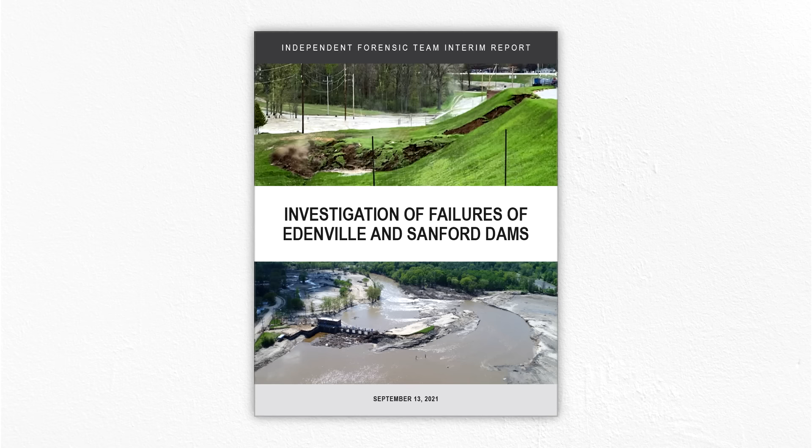The independent forensic team charged with investigating the event released an interim report on the failures in September 2021. The conclusions of the report include a discussion of a relatively rare phenomenon in earthen dams. Let's walk through the investigation and try to understand what happened.

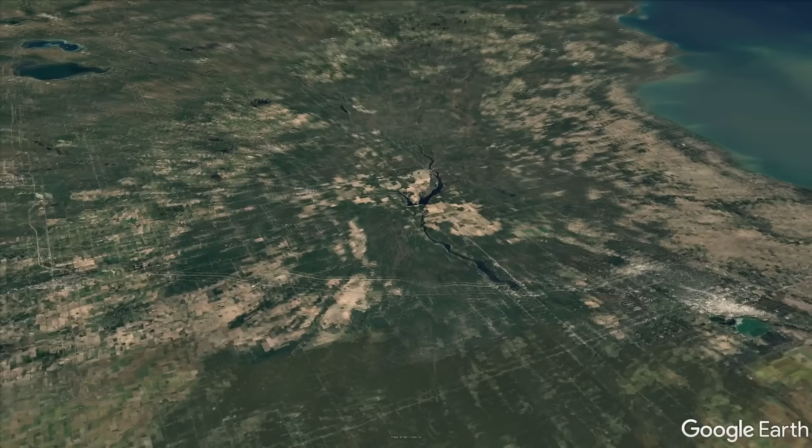Edenville and Sanford dams were two of four dams owned by Boyce Hydropower along the Tittabawassee River in Michigan. The dams were built in the 1920s to generate hydroelectricity. Edenville Dam was constructed just upstream of the confluence with the Tobacco River. It was an earth-fill embankment dam with two spillways and a powerhouse.

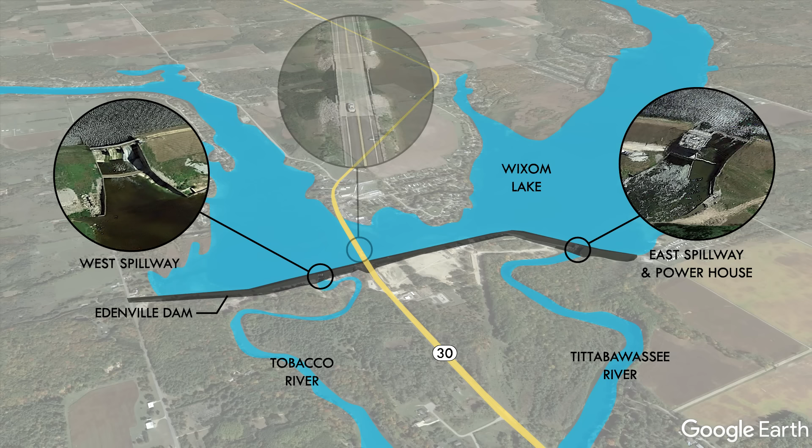The water impounded by the dam formed a reservoir called Wixom Lake, nearly the entire perimeter of which was surrounded by waterfront homes. State Highway 30 bisected the dam along a causeway, splitting the lake between the two rivers with a small bridge to allow water to flow between the two sections of the reservoir.

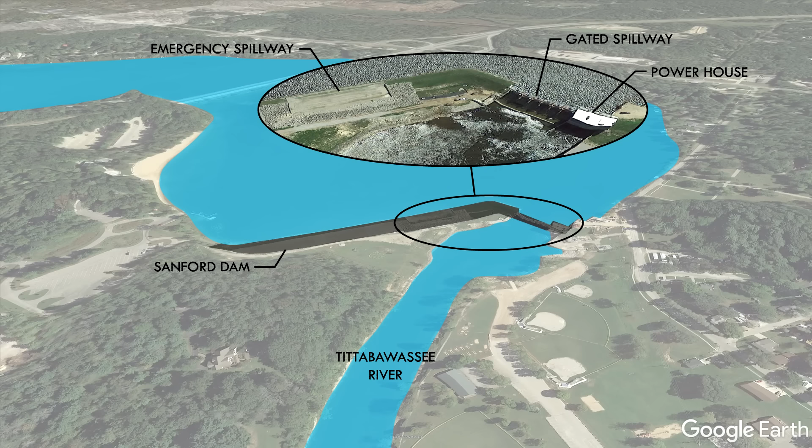Sanford Dam downstream was a similar structure as Edenville, but not nearly as long. It consisted of an earthen embankment, a gated spillway, an emergency spillway, and a powerhouse for the turbines, generators, and other hydroelectric equipment.

Edenville Dam in particular had a long history of acrimony and disputes between the dam owner and regulatory agencies. Most dams that generate hydroelectricity in the U.S. are subject to oversight by the Federal Energy Regulatory Commission, or FERC. But Edenville Dam had its license to generate hydropower revoked in 2018 when the owner failed to comply with FERC's safety regulations.

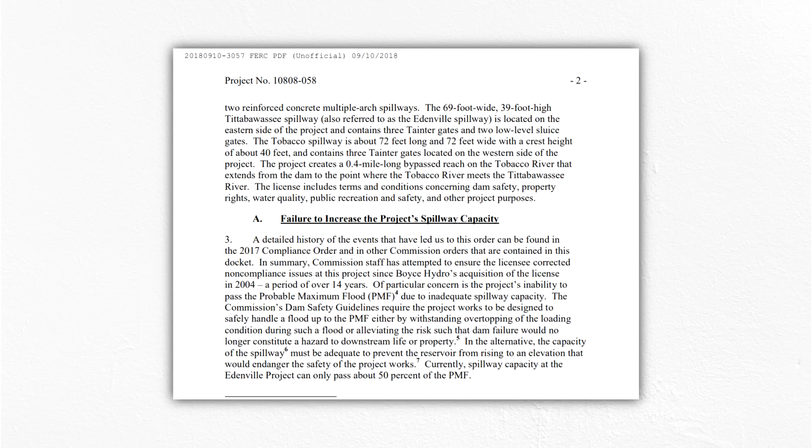Their report listed 7 concerns, the most significant of which was that the dam didn't have enough spillway capacity. As a result, if a severe storm were to come, the dam wouldn't be able to release enough water to prevent the reservoir level from climbing above the top of the structure, overtopping it and likely causing it to fail. After losing the license to generate hydropower, jurisdiction over the dam fell to the state of Michigan, where disagreements about its structural condition, spillway capacity, and water levels in Wixom Lake continued.

The days before the failure had already been somewhat rainy, with small storms moving through the area. But heavy rain was in the forecast for May 18th. The deluge arrived early that morning, and it didn't take long for the water levels in Wixom Lake to begin to rise. By 7 a.m., operators at the dam had started opening gates on both spillways to release some of the floodwaters downstream.

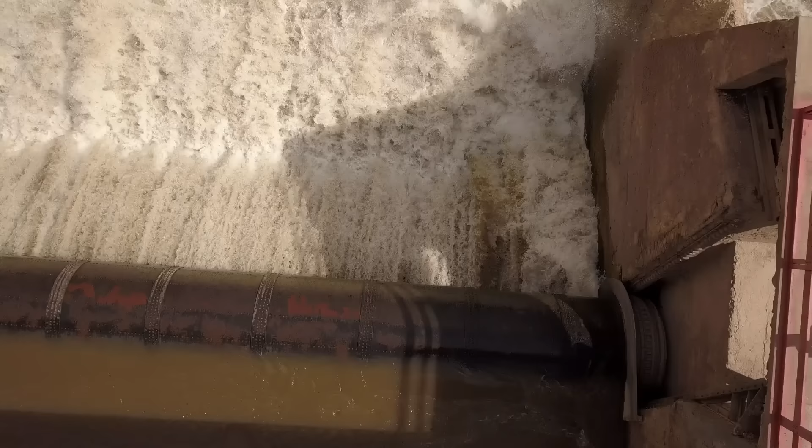Gate operations continued throughout the day as the reservoir continued rising. At 3:30 p.m., all 6 gates, 3 at each spillway, were fully opened. From then on, there was nothing more operators could do to get the floodwater out faster, and the level in Wixom Lake continued to creep upwards. That night, the lake reached the highest level in its history, only about 4 feet or 1.3 meters below the top of the earthen dam.

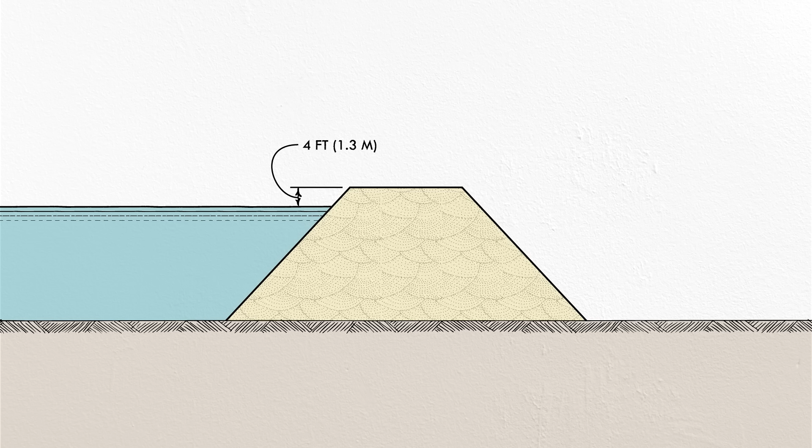At daybreak on May 19th, it was already clear that Edenville Dam was struggling from the enormous forces of the flood. Operators noticed severe erosion from the quickly flowing water in the reservoir near the east spillway along the embankment. Regulators and dam personnel met to review the damage, and a contractor was brought in to deploy erosion control measures. And still, the water kept rising.

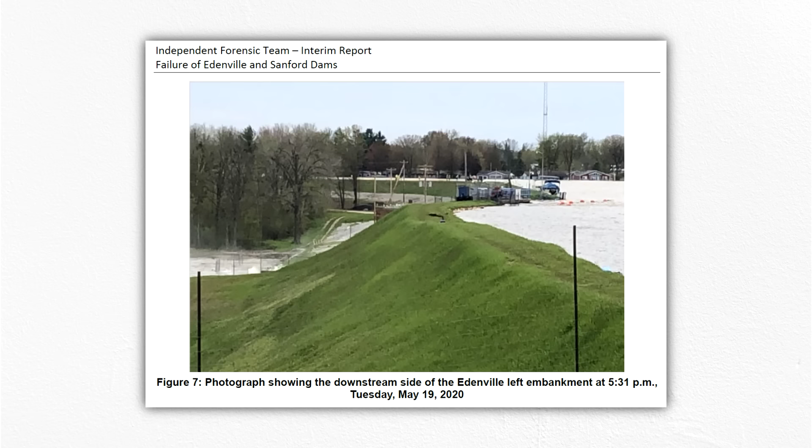By 5 p.m., Wixom Lake had risen to within around a foot or 30 centimeters from the top of the dam. As crews worked to mitigate the erosion problems in other places, eyewitnesses noticed a new area of depression on the far eastern end of the dam. This part of the embankment hadn't been a significant point of focus during the flood because it wasn't experiencing visible erosion, but it was apparent something serious had happened.

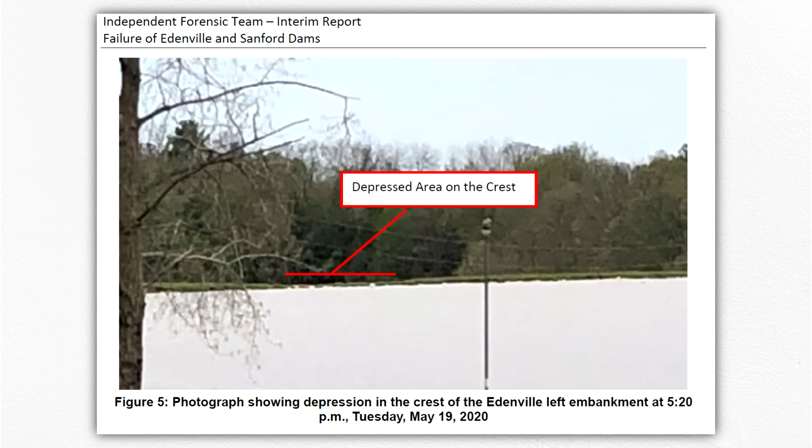Photos from a few hours earlier didn't show anything unusual, but now the top of the embankment sank down nearly to the reservoir level. Eyewitnesses moved to the nearby electrical substation to get a better look at this part of the dam. Within only a few moments, the embankment failed. Lynn Coleman, a Michigander and one of the bystanders, caught the whole thing on camera. Over the next 2 hours, all of Wixom Lake drained through the breach in the dam.

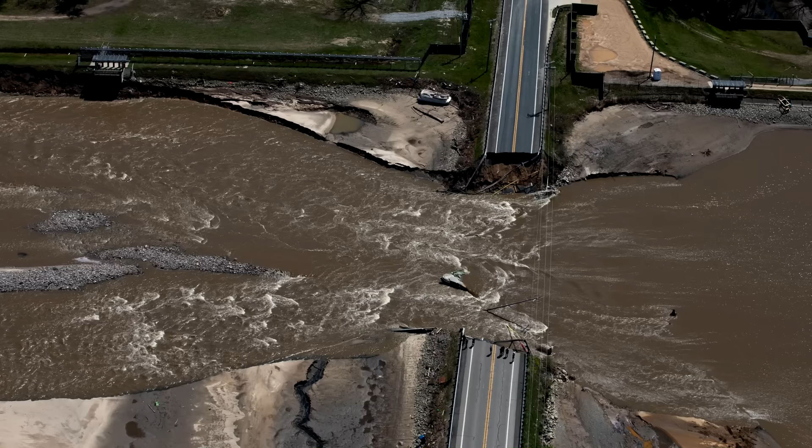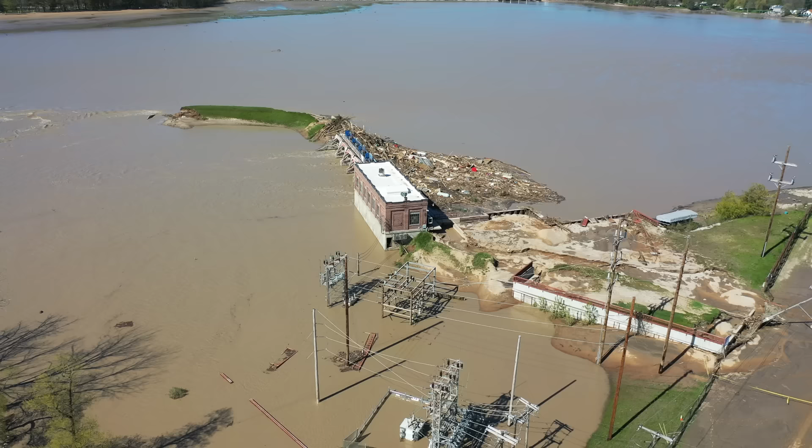Water rushing through the narrow gap in the causeway washed out the highway bridge, and all of the waterfront homes and docks around the entire perimeter of the lake were left high and dry. As the floodwaters rushed through the breach into the river, the level downstream in Sanford Lake rose rapidly. By 7:45, the reservoir was above the dam's crest, quickly eroding and breaching the structure.

With the combined volumes of Wixom and Sanford Lakes surging uncontrolled down the Tittabawassee River, downstream communities including Sanford, Midland, and Saginaw were quickly inundated. Google Earth shows aerial imagery before, during, and after the flood so you can really grasp the magnitude of the event. More than 10,000 people were evacuated, and flooding damaged more than 2,500 structures. Amazingly, no major injuries or fatalities were reported.

In their interim report on the event, the independent forensic team considered a broad range of potential explanations for what happened at Edenville Dam. Although the spillway for the dam was undersized per state regulations, this storm didn't completely overwhelm the structure. The level in Wixom Lake never actually went higher than the top of the embankment. So overtopping, one of the most common causes of dam failure, including the cascading loss of the downstream Sanford Dam, was eliminated as a possible cause of failure for Edenville Dam.

The team also looked at internal erosion, a phenomenon I've covered on this channel before that has resulted in many significant dam failures. Internal erosion involves water seeping through the soil and washing it away from the inside. However, this type of erosion usually happens over a longer time period than what was witnessed at Edenville Dam. No water seepage exiting the downstream face of the embankment or eroding soil was evident in the time leading up to the breach, ruling this mechanism out as the main cause of failure.

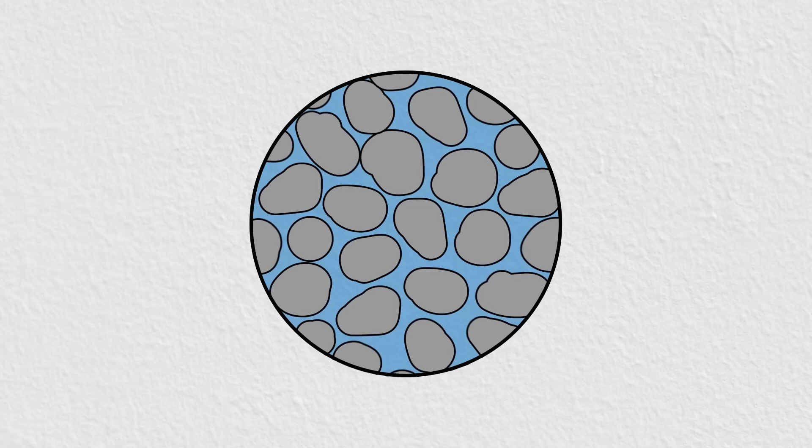Liquefaction happens when soil experiences an applied stress, like an earthquake, that causes it to behave like a liquid, and it mostly happens in cohesionless soils, those where the grains don't stick together, such as sand. When a body of cohesionless soil is saturated, water fills the pore spaces between each particle. When a load is applied, the water pressure within the soil increases, and if it can't flow out fast enough, it forces the particles of soil away from each other. A cohesionless soil's strength is derived entirely from the friction between the interlocking particles. So, when those grains no longer interlock, the ground loses its strength.

Some of the most severe damage from earthquakes comes from the near instant transformation of underlying soils from solid to liquid. Buildings sink into their foundations, sewer lines float to the surface, and roads crumble without underlying support. Liquefaction typically requires cyclical loading, like during an earthquake, or extreme sudden displacements to trigger the flow. Gradual increases in loading will only cause the water within the soil to flow out, equalizing the pore water pressure. But some soils can reach a point of instability and liquefy under sustained or gradually increasing loading conditions in certain circumstances. This phenomenon is known as static liquefaction.

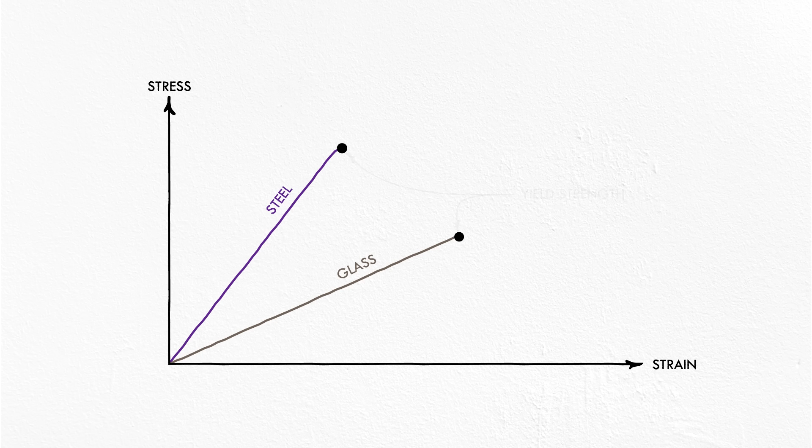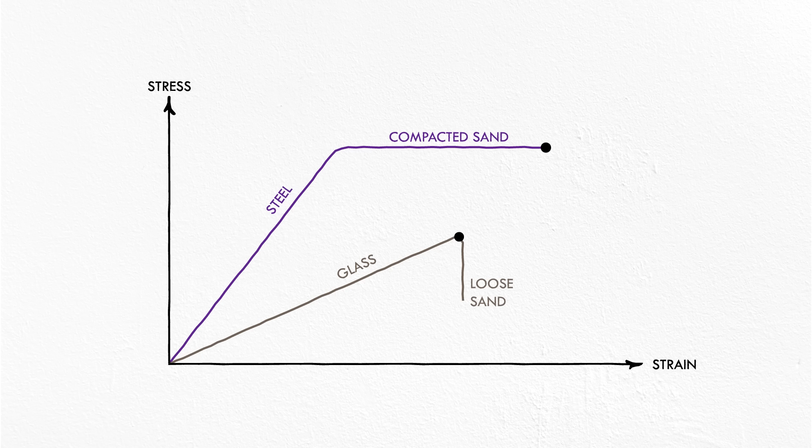A good analogy is the difference between glass and steel. Both materials have a linear stress-strain curve at first. In simple terms, the harder you push, the harder they push back. But both reach a point of peak strength, beyond which a soil will fail or deform. Well-compacted sand is like steel. It fails with ductile behavior. If you stress it beyond its strength, it deforms, but the strength is still there. In other words, if you want to keep deforming it, you have to keep applying a force at its peak strength. On the other hand, loose sand is like glass. If you push it beyond its peak strength, it fails with brittle behavior, suddenly losing most of its strength.

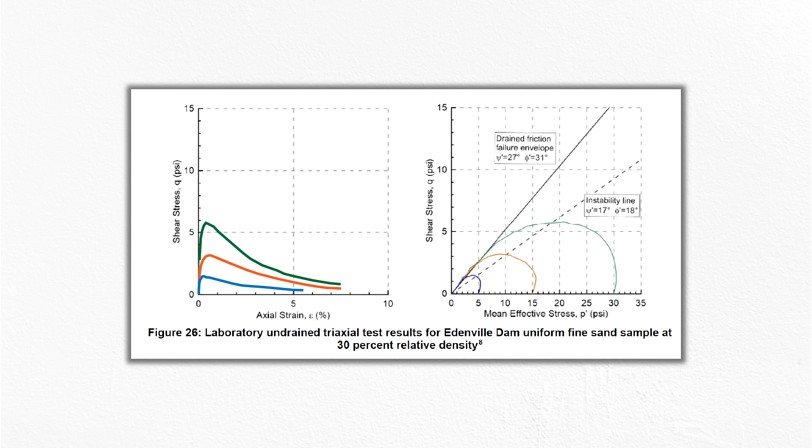The independent forensic team took samples of the soils within the Edenville Dam embankment and subjected them to testing to see if they were liquefiable. The tests showed brittle collapse behavior necessary for static liquefaction. They also reviewed construction records and photographs where no compaction equipment was seen.

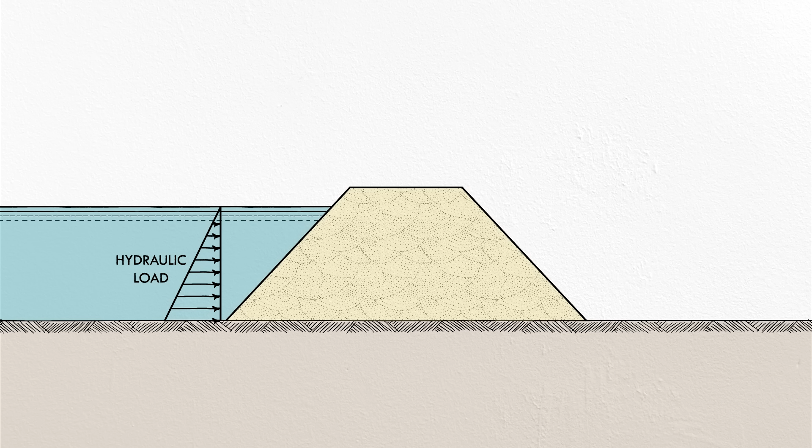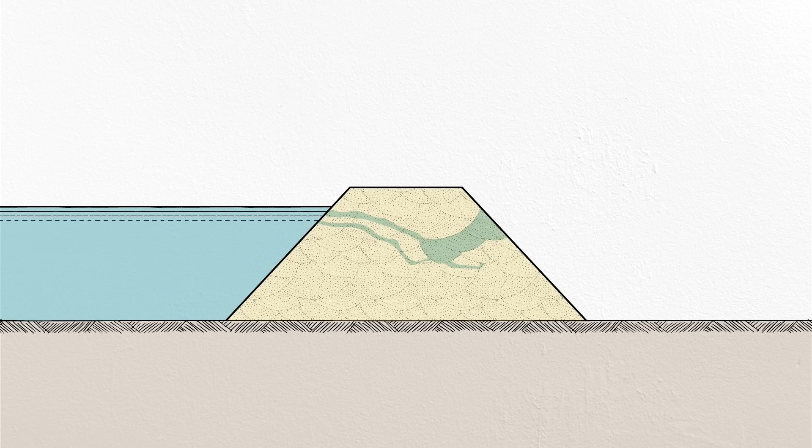The team concluded that as the level of Wixom Lake rose that fateful May evening, it increased the hydraulic load on the embankment, putting more stress on the earthen structure than it had ever been asked to withstand. In addition, the higher levels may have introduced water from the reservoir to permeable layers of the upper embankment, as evidenced by the depression that formed before the failure, increasing seepage and thus increasing the pore water pressure of saturated, uncompacted sandy soils within the structure.

Eventually, the peak strength of the embankment soil was surpassed and a brittle collapse resulted, liquefying enough soil to breach a downstream section of the dam. A few seconds later, lacking support from the rest of the structure, the dam's upstream face collapsed and all of Wixom Lake began rushing through.

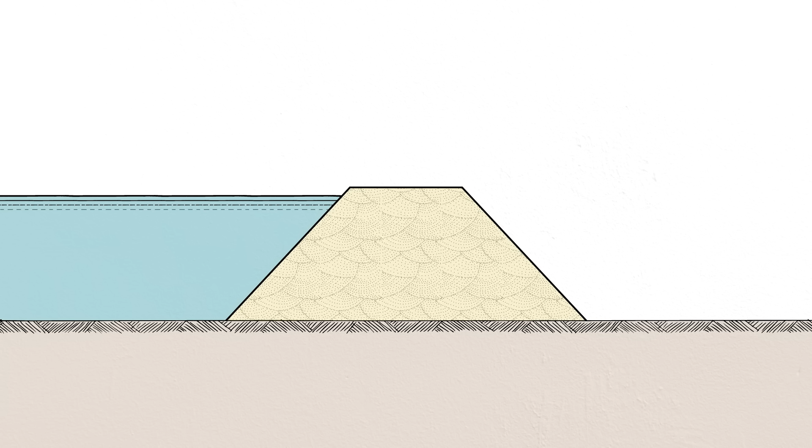Edenville Dam was built in the 1920s, before most of our current understanding of geotechnical engineering and modern dam safety standards existed. Most dams are earth and embankment dams, but modern ones are built much differently than this one was. Embankments are constructed slowly from the bottom up in individual layers called lifts. This lets you compact and densify every layer before moving upward, rather than just piling up heaps of loose material.

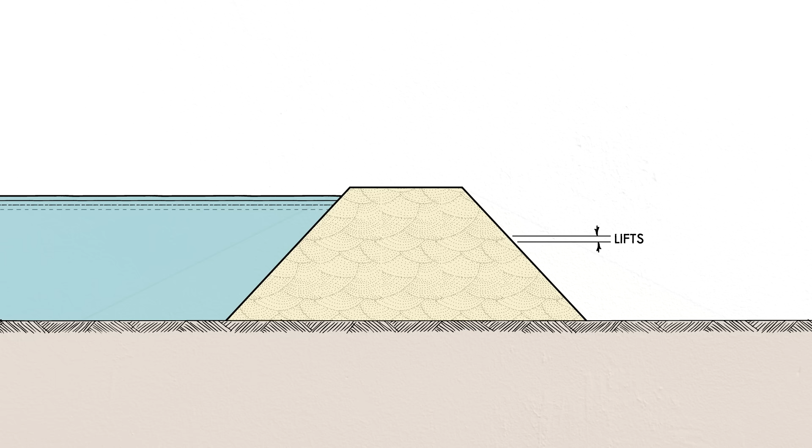We use gentle slopes on embankments to increase long-term stability, since soils are naturally unstable on steep slopes. We have strict control over the type of soil used to construct the embankment, constantly testing to ensure the properties match or exceed the assumptions used during design. We often build an embankment of multiple zones.

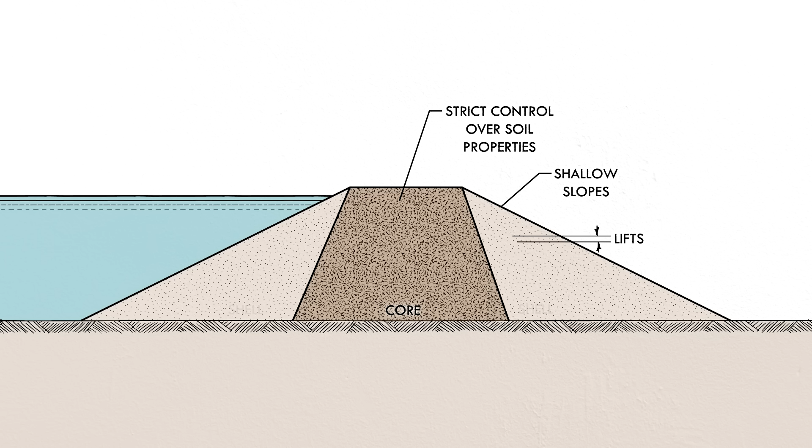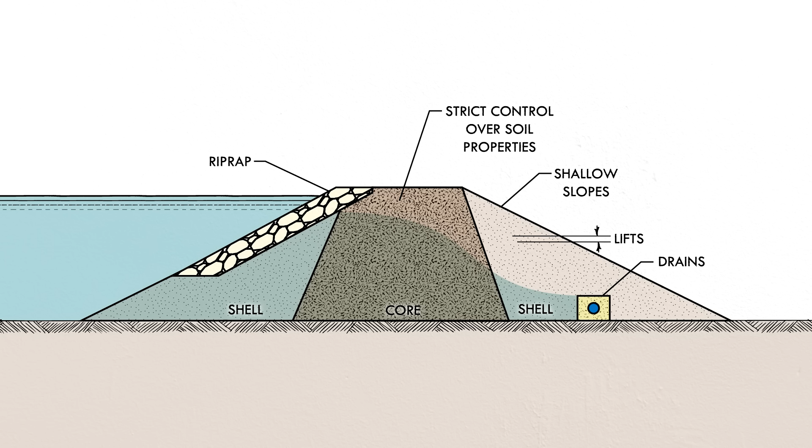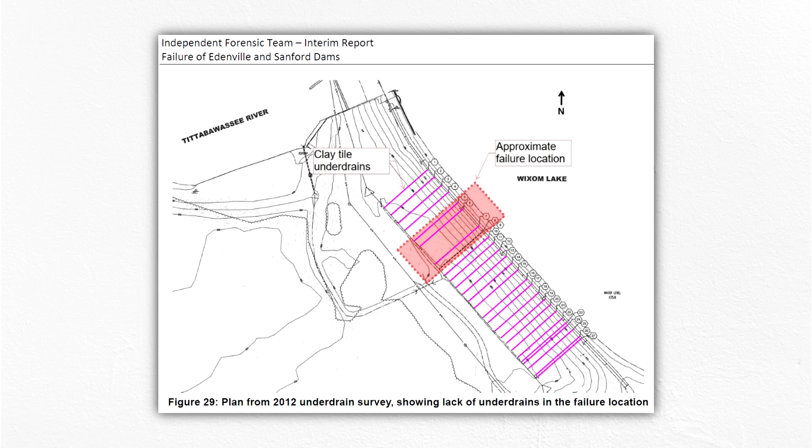The core is made of clay soils that are highly impermeable to seepage, while the outer shells have less stringent specifications. We include rock riprap or other armoring on the upstream face so that waves and swift water in the reservoir can't erode the vulnerable embankment. And we include drains that both relieve pressure so it can't build up within the soil and filter the seepage to prevent it from washing away soil particles from inside or below the structure. Edenville Dam actually did have a primitive internal drainage system made from clay tiles, but many of the drains in the area of the failure appeared to be missing in a recent inspection.

Although it seems like an outlier, the story of Edenville and Sanford dams is not an unusual one. There are a lot of small old dams across the United States built to generate hydropower in a time before everyone was interconnected with power grids. Over time, the revenue that comes from hydropower generation gradually declines as the maintenance costs for the facility and the danger the dam poses to the public both increase.

However, the reservoir created by the dam is now a fixture of the landscape, elevating property values, creating communities and tourism, and serving as habitat for wildlife. You end up with a mismatch of value where most of the dam's benefits are borne by those who don't incur any responsibility for its upkeep, or liability for the threat it poses to downstream communities. Even owners with the best intentions find themselves utterly incapable of good stewardship.

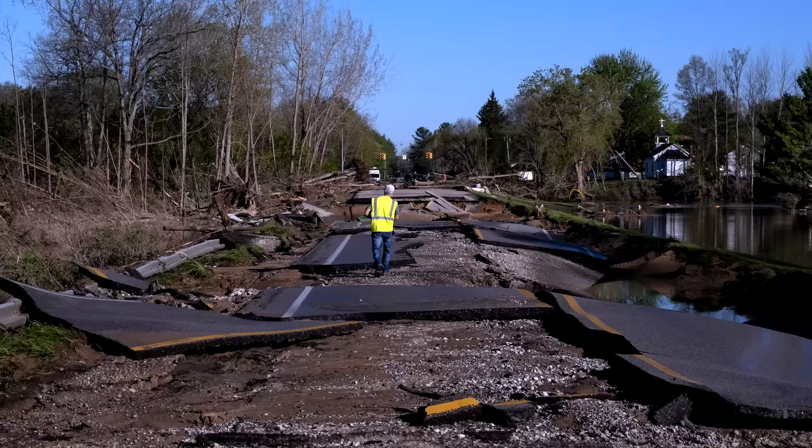Combine all that with the fact that regulatory authorities are often underfunded and lack the resources to keep a good eye on every dam under their purview, and you get a recipe for disaster. After all, there's only so much you can do to compel an owner to embark on a multi-million-dollar rehabilitation project for an aging dam when they don't have the money to do it and won't derive any of the benefits as a result. Since the failure, the dam owner, Boyce Hydro, filed for bankruptcy protection, and the counties took control of the dams with a nonprofit coalition of community members and experts to manage repair and restoration efforts.

Of course, there's a lot more to this story than just the technical cause of the failure, and the final independent forensic team report will have a deeper dive into all the human factors that contributed to the failure. They expect that report to be released later in 2021. Dams are inherently risky structures, and it's unfortunate that we have to keep learning that lesson the hard way.